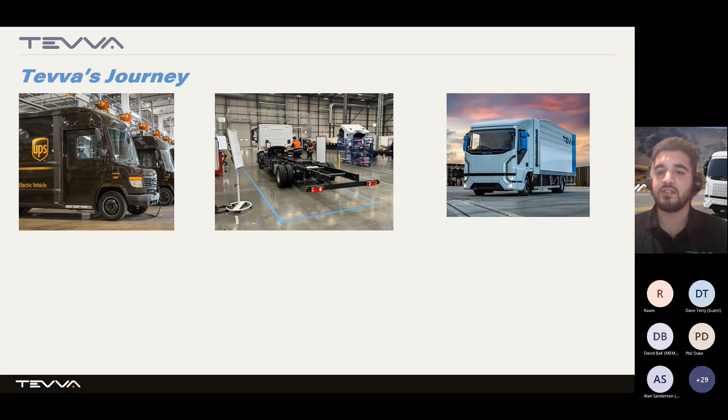The bottom left is our main headquarters in Tilbury, Essex, just outside of London. We moved into this facility in October 2021, and it is already a fully functioning production line, and at full capacity on a double shift could produce 3,000 trucks a year.

This next image is the first truck to come off our production line and be delivered to our first customer, obviously another massive milestone we're very proud of. And the final image I'm putting on the screen for you there is our production line as it was earlier today, which is a picture I took of the production line in full swing.

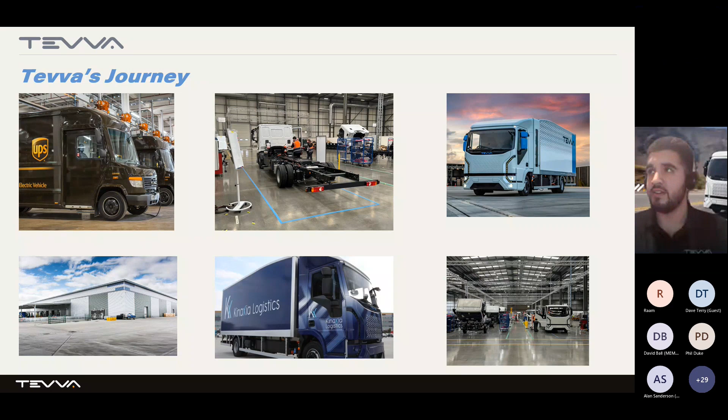On the next slide, I have a video, which is just a couple of minutes, and I put it in there just to give you an introduction to our products. I think it explains our dual energy product better than I ever could just with words. So please have a look.

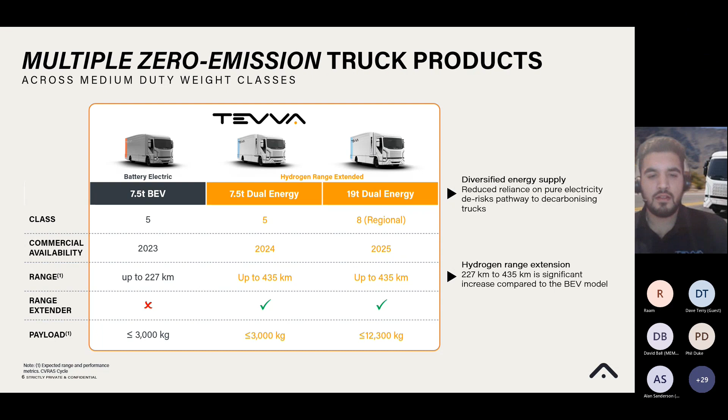I mentioned briefly earlier our history of UPS and the real world verification of our systems we have under our belt. But I think it's also important to mention an often forgotten part: the driver experience benefits of driving an electric vehicle.

If you compare spending 8 hours behind the wheel of a battery electric vehicle to sitting on top of a diesel engine with all its fumes, vibrations, and noise, it's a massive difference.

It's also something I learned when doing my truck license last year—just how hard navigating inner city junctions and roundabouts in a combustion engine truck can be. If you've ever done it, you put your foot down and the truck goes nowhere. The acceleration is so slow you end up waiting several minutes at every roundabout, or in my case, perhaps on my test, cutting people off.

We're not making racing trucks, but the higher torque of the electric motors does mean we get off the line very quickly, and it's something for drivers to enjoy, as well as the effects of regenerative braking, which means you can often drive with just one foot.

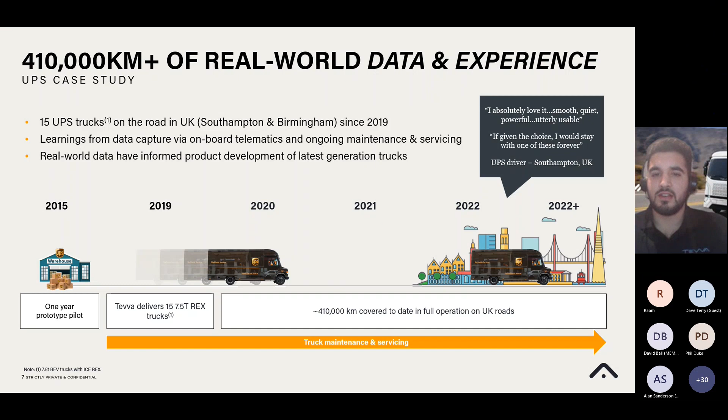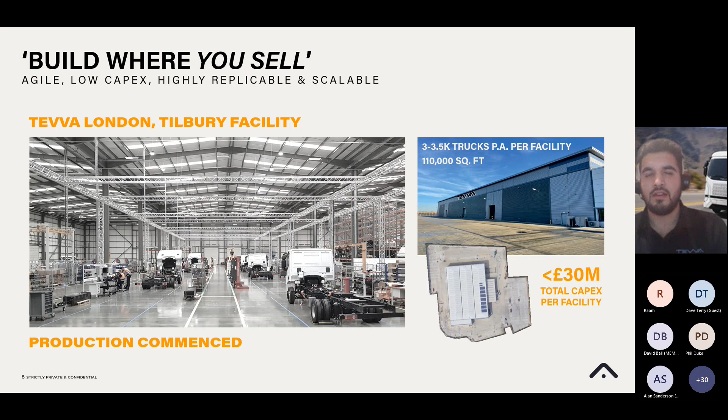Hopefully just wrapping up some information about Tevva—this is our production facility. The idea behind this being small, low capex facilities is that they can be set up quickly and close to the markets we're looking to sell in. One final piece of information just to ram it home for you.

Our whole vehicle type approval was achieved earlier this month, and the vehicles will be going over to customers for demos and into sales very soon as well.

We also, last week, became the first British manufacturer of a small truck to be eligible for the government's plug-in grant, which gives customers a £16,000 discount on their purchase. Being an electric truck, we know our upfront cost is always going to be more expensive than our diesel equivalents, so any help we can get like that really does go a long way.

So now hopefully you know a bit more about Tevva, and you can let me get into the reasoning behind some of the decisions we've made and the motivations behind the conclusions we've come to.

So, the problem: if we look at CO2 emissions globally, nearly a fifth of them come from transportation. That's obviously a massive problem. And when we break that down further, you see a lot of these emissions are coming from trucks—medium and heavy duty trucks, 22%.

Most cars have an extremely short average daily drive, which makes them fairly straightforward to electrify. First of all, you don't need much energy to begin with, and payload is not so much of a concern. If you drive to work and can charge at work, or come home to your driveway and charge there, most people agree electrifying cars is not really so much of a challenge. The challenges are more around sourcing of components and raw materials for batteries than around the concept itself.

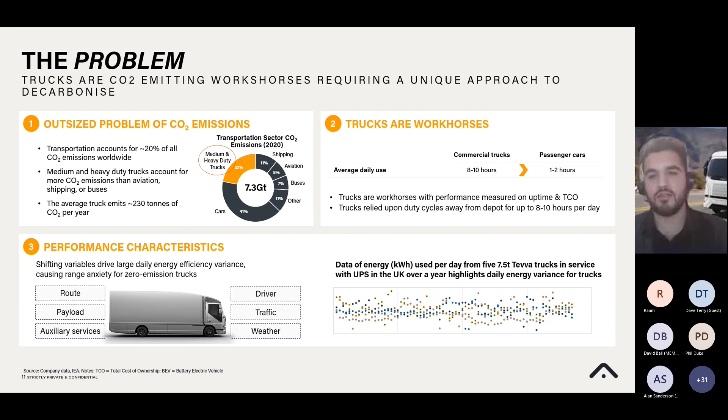So what is our solution? We try and take the balance between battery and hydrogen as fuel sources for a vehicle. We all know that battery electric vehicles are very efficient, and when you have sufficient infrastructure to charge them, they can be ideal. For cars, this is getting in a pretty good place. More and more every single day, there are more EV charging points. But EV charging infrastructure for HGVs is nowhere near as prevalent as it is for cars.

I can speak from personal experience of taking Tevva trucks - we're parking across several parking spaces in a supermarket just trying to get to the charger, or maybe we're waiting at a service station because the infrastructure isn't there for HGVs. And when you need to travel long distances and carry larger payloads, batteries can be a problem. We've highlighted here that a 700 kilogram battery can deliver between 80 and 90 kilowatt hours of energy. A hydrogen cylinder that does the same thing can weigh 100 kilos. And when you consider these hydrogen tanks can also be refueled in times comparable to diesel tanks, it really does start to question - how do we make this balance work?

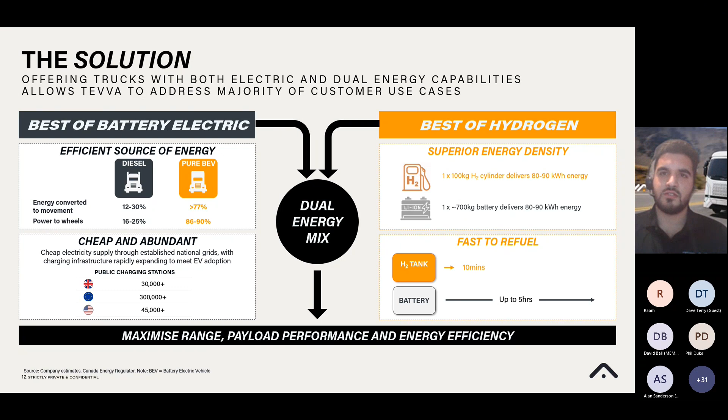Because we know that hydrogen is more expensive, it's harder to get hold of, but you might need it to take your vehicle to achieve what you want it to achieve. So we have what we call the balancing act and the justification for our dual energy product.

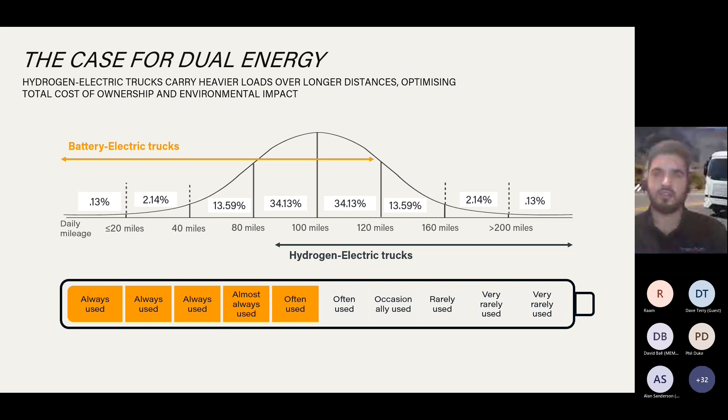So if there was just one slide or a couple of slides that I could show you today, it would be this one and the next one. This really is what we call the case for our dual energy product. And I will say that this dual energy product is something that Tevva is fairly unique in doing. Most of the other people in this space fall into two of the categories I've listed here as the hydrogen and the BEV.

So if we take the diesel truck as a baseline, because this is the problem here, this is what we're trying to get rid of. We know that diesel products can transport big payloads and take them long distances. However, we all know the damage they do to the environment. They're cheap to purchase, but especially in recent years, they've become increasingly expensive to fuel. The total cost of ownership of a diesel truck might be more than 75% the fuel you use to refuel it with. And that's before you consider costs from taxes and the ever increasingly prevalent zero emission zones.

Everyone knows about London's zero emission zone, but you're seeing them cropping up now in Bristol, in Birmingham, in Bath, Oxford, and many other cities.

These zones are not going away anytime soon. They're only going to become more prevalent. And obviously, if you're operating a diesel truck, this can be a killer for your business.

Now, if I take you down to the next item on the chart, is a full hydrogen truck. That is one that you wouldn't plug in to charge, unlike ours, which needs to be charged and refueled with hydrogen. To be clear, all hydrogen fuel cell vehicles will have some battery of some size. This battery allows you to take advantage of regenerative braking and also allows you to cover transient loads.

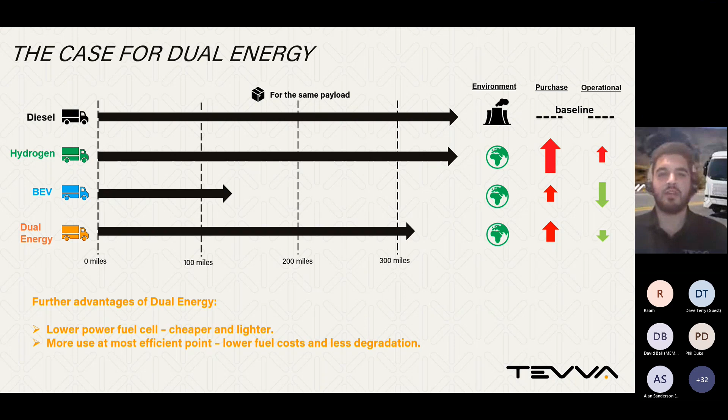Now, hopefully this slide helps get that point across even more. There's an expression, horses for courses, which I particularly like for explaining this. And I've got these 3 theoretical customers here. Now, customer number 1, he delivers bread in central London. We often use bread as an example of something that's lightweight, but has a large volume, so you need a truck. Another good one is toilet paper, tissue boxes. You can think of some other examples, I'm sure.

So they have their set payload of 2 tons and they need to travel 80 miles a day on their route that never changes. Here, a battery electric product is the ideal choice. Because you don't need to travel so far, the amount of batteries you require don't make payload an issue. You have low TCO from a low fuel cost and no emissions charges, etc.

Now, customer 2 is where we see a much bigger chunk of the market. This is much more typical in the product that people need.

So this customer, they transport clothes. It doesn't really matter what it is, it typically weighs 2 tons. Most days they drive 120 miles from London to Birmingham, but once a week they have to drive 250 miles to Liverpool. So what we have here, and this is where I'll explain a bit more about our dual energy truck: we have a 112 kilowatt hour battery and 2 5-kilo cylinders of hydrogen that add another 160 kilowatt hours.

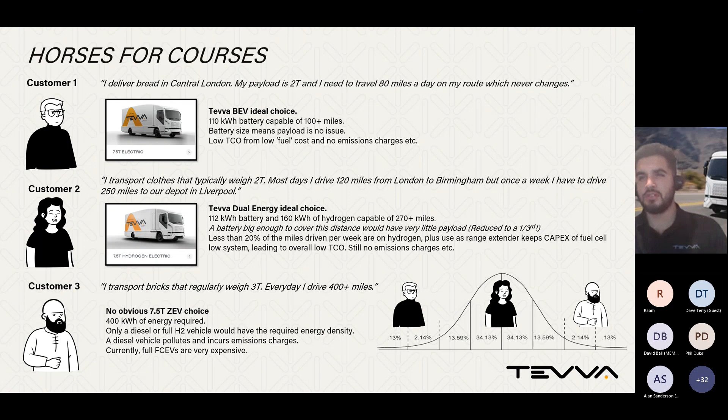And then what I've done in the bottom right there is I've overlaid these 3 customers we're imagining with the bell curve I showed you earlier, which shows how the battery electric vehicle captures one of the first little chunks of the market. The dual energy product we see as covering most of the market, only unsuitable for the most extreme drive cycles.

So just to tell you a little bit more detail about the dual energy product, here it is up on the screen. We've highlighted some of the key points. If I go around clockwise, the first thing we have is our e-motor: the twin motor and single speed gearbox is all within the same casing. These motors are 100 kilowatts each and placed in series.

The inverters, there's one per motor, is an electronic device capable of changing the frequency of the wave to change the speed of the motor. So these are switched reluctance motors, which is a technology that hasn't often been applied to electric vehicle motors. It's something we've done in collaboration with a company called AEM up in Newcastle. This also means they have no rare earth metals, which is another key selling point. Those motors which use a permanent magnet often use rare earth metals.

I'm sure you're probably aware of it, but these switched reluctance motors have a stator with poles that are not permanent magnets, but electromagnets that are energized in a certain sequence. Now, controlling this can be extremely difficult, but nowadays, thanks to power electronics advancements, it's something that's possible. So that's what we've been able to develop for our vehicle.

Moving further around, we've got our hydrogen range extender system, which is what we've been talking about. There's the black box underneath the cab, sits in what used to be the engine bay, that's the hydrogen fuel cell. And then you can see there the frame of the hydrogen cylinders, sorry, and also some other parts for the hydrogen fuel cell's cooling loop.

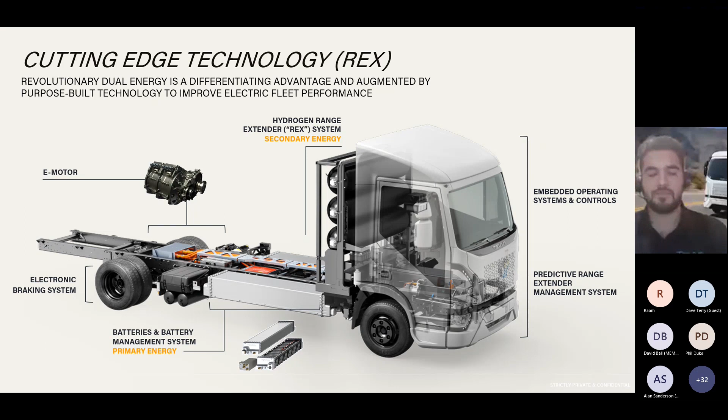Next section I've called the infrastructure challenge. The first thing anyone says when we talk about building a hydrogen vehicle is, where am I going to get the hydrogen from? It's something customers are worried about.

I don't know if it's something people on this call are interested in, but I feel it would be improper of me not to mention it. There's so many benefits around what we can do with hydrogen production and how it compares to delivering electric charging on the scale we would need for HGVs.

Hydrogen can be produced on site in various locations and then transported where it's needed and dispensed in refueling stations that don't look dissimilar to what already exists. And that's before we get into that most customers will have on-site diesel refueling for their trucks. This is something we can accomplish fairly easily with a series of partners and have H2 delivered at their depot. This is not something you can necessarily do with electric charging.

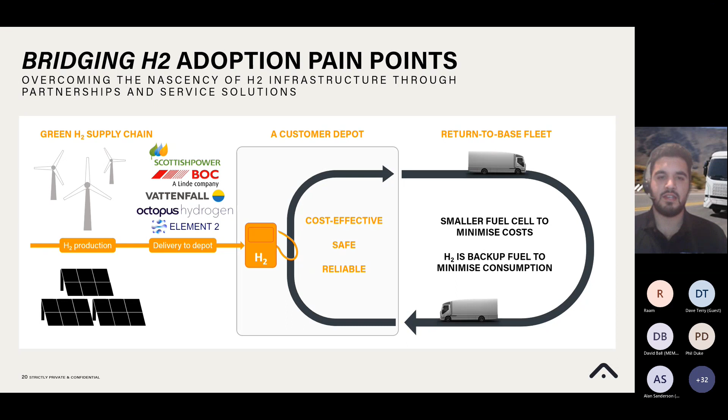The dual energy product, we've gone through most of the design phases. We just need to go through those loops of redesigning, testing the product as a whole, getting it into customer hands, and integrating their feedback into the finished product. But what I want to begin with is showing you a bit about where we've been. This talk is called the challenges of developing the UK's first hydrogen electric truck. Let's get into some of those challenges.

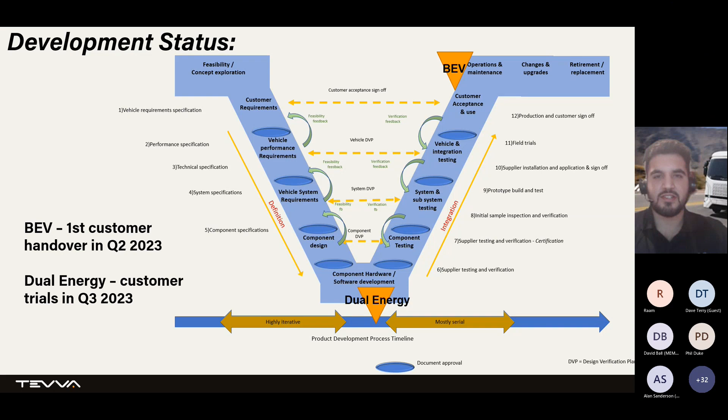We started with a long list of more than 15 hydrogen fuel cell suppliers, got that down to 4 that were our top 4, and 3 out of the 4 suppliers even pre-issued these fuel cells to us, such was their desire to be considered for selection.

I've also got another video showing them, a very short video, in action at the Millbrook Proving Ground, which will be familiar to some of you on the call, just to show you how far we've come from these hastily put together pieces of testing equipment to the glossy finished product we have now.

So I don't think there's any sound on this one either for you, but this is just 3 of the 4 vehicles in action.

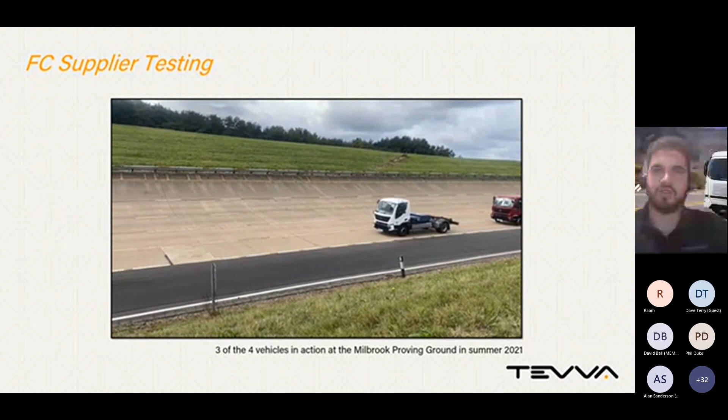When we're testing hydrogen fuel cell vehicles like this, chiefly the first thing we need to do is keep moving to keep running the battery down, so we can work on that control software of switching the fuel cell off and on, as well as testing various fuel cell parameters like its efficiency, its performance, how quickly it takes to boot up and boot down again. Cooling performance is a big one.

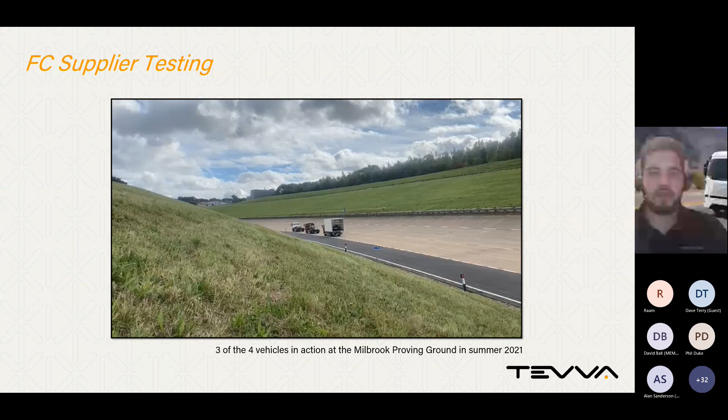There was over 100 factors we scored the hydrogen fuel cells by before making our final selection for the finished product. Then fast forward over a year's time, we have our glossy integrated finished prototype, and this is what it can do.

We did a drive from the Scottish border at Berwick-upon-Tweed. The left-hand side shows how far the battery electric vehicle made it, just past Durham. It barely glimpsed, I don't think it quite glimpsed, the Angel of the North on its way down.

Our extra dual energy product made it to the ring of the M25. We were hoping it would make it all the way back to our base in Essex, but 331 miles, pretty good going.

We thought for a first run, and as you can see there, it was snowy, icy conditions, so we think on a warmer day we might have made it all the way back to our base in Tilbury. But I hope this clearly shows the stark benefits of having the additional energy from the hydrogen fuel cell on the 7.5-ton vehicle.

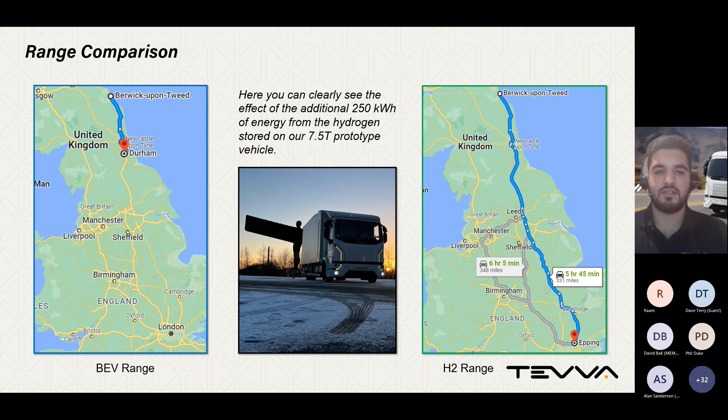So, challenges of developing the UK's first hydrogen electric truck. Some of these points I've spoken about already, and hopefully some of it will serve as a summary, but some of it will be some new information as well.

The first thing we've encountered as being a problem is education regarding hydrogen safety. Now, it's fantastic to see people like yourselves on this call, eager to find out more, because really, once you're educated about the risks of hydrogen, without trivializing them, it's all manageable.

There are inherent properties of hydrogen. It's the lightest element in the universe. It makes it very difficult to contain, which people see as a problem because of the way it leaks.

However, when used properly, this can be its greatest advantage. If you have a leak of hydrogen, if you don't encase it in a place where it can pool and concentrate, it will simply be buoyant and go away to the atmosphere. The same can't be said for diesel and diesel vapor, which forms harmful pools at floor level that are easy to ignite.

We've constantly run into people who are concerned about having our vehicle inside at shows, or even just having it on their site. Really just educating people and drivers about it is perhaps one of the biggest challenges we have.

We also have the regulation landscape. Everything in the world of hydrogen is so new that we often run into struggles with lack of clarity in relevant regulations. I've named a couple there regarding hydrogen exhaust content and side impact tests, which is too detailed perhaps to get into now, but there's a lack of clarity in the regulations and there's no blueprint for doing any of this stuff. It really is cutting edge, and even the regulatory authorities aren't sure what the best answers are.

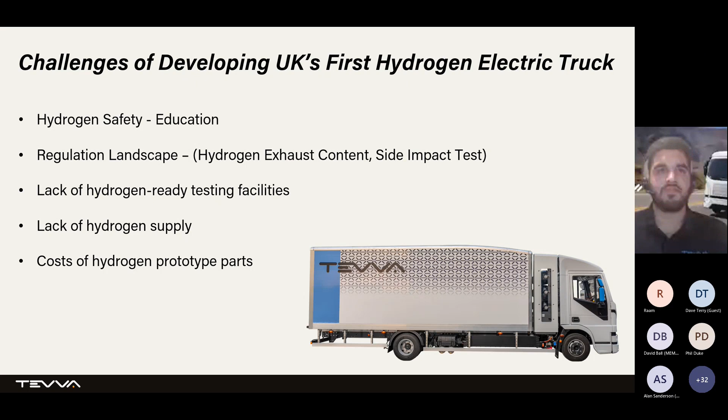The UK has an extremely limited number of hydrogen refueling stations. At the last count, it had no more than 10. Sourcing small amounts of hydrogen for private use is difficult because you're dealing with massive energy companies that don't see you as worth their time. And there's the good old-fashioned cost element as well. The cost of hydrogen prototype parts makes development an extremely expensive endeavor, even if they're promised to come down with quantities later.

So to get into the conclusions, what I want to talk about today is what we call the balancing act. Basically, we see it as three simple statements that form a balance. A pure battery electric vehicle is a good solution, but it's not ideal for every truck duty cycle. There are numerous truck duty cycles which simply cannot be covered by a battery electric truck. Hydrogen fuel cell vehicles will be a reality, but for what vehicles and when will the TCO be optimized? For some vehicles the TCO will be optimized faster than others, and that's what ultimately will drive for what vehicles and when.

Current fuel cell and hydrogen costs make full hydrogen vehicles an expensive choice, suitable only for the most extreme duty cycles. This will change in time as well, we just don't know when. However, at the moment, what we at Tevva are doing, and what I hope I've shown you a bit about today, is that dual energy provides the optimum balance of payload, TCO, and range for many customer duty cycles. It's that balance we're trying to achieve.

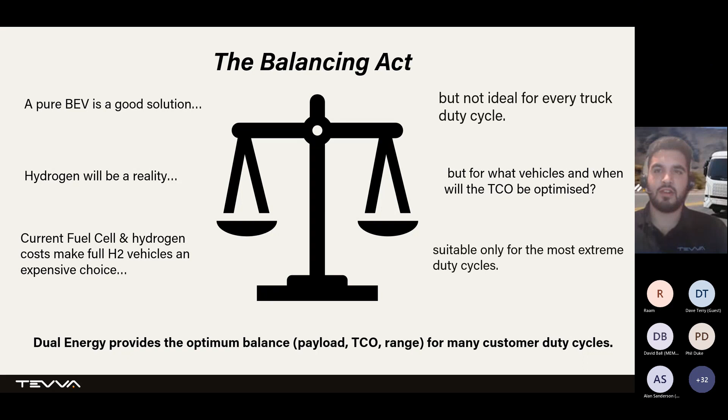Now, I believe hopefully there's some questions for me. But first of all, I just want to say thank you for listening. I hope you found it interesting. And if there are any questions that don't get answered, or you don't want to ask right now, I have my email on the screen, I'll leave it up for a little bit while I answer some questions. Yeah, thank you.

Thank you so much, that was really fascinating. Even I didn't know some of the things you mentioned today, despite how we met and what we did and everything. So thank you for all of that. You did rightly guess we have a lot of questions that have come through as the talk was going on.

I'll start with Nick Birkby's question: what is the UK hydrogen infrastructure like at the moment for fueling trucks? I've touched on this a bit throughout the talk, but I'll say it again: the UK has about 10 refueling stations at the moment. Most are run by a company called Motive Fuels, which used to be part of ITM Power. They've recently taken the decision to close some of the stations they'd opened a couple of years ago, because they're pivoting away - they initially set these stations up as suitable for cars, seeing hydrogen as a potential solution for cars. In their statement closing some stations, they realized they'd potentially made a miscalculation, and that trucks and heavy duty vehicles are the way forward. So there are still a handful of stations open - there's a very good one in Birmingham, and Air Products operate one at Heathrow Airport that was set up for the 2012 Olympics. But to be honest, we don't want our customers to have to rely on public infrastructure. That's why I mentioned depot-based refueling, because we don't see public infrastructure as something that can be relied upon. In other countries in Europe, particularly Germany, and in California in the US, and the Far East in Asia, they have suitable public infrastructure that you could run a truck with no problem, without any depot-based refueling. But in the UK, unfortunately, that's just not the reality of where we're at right now.